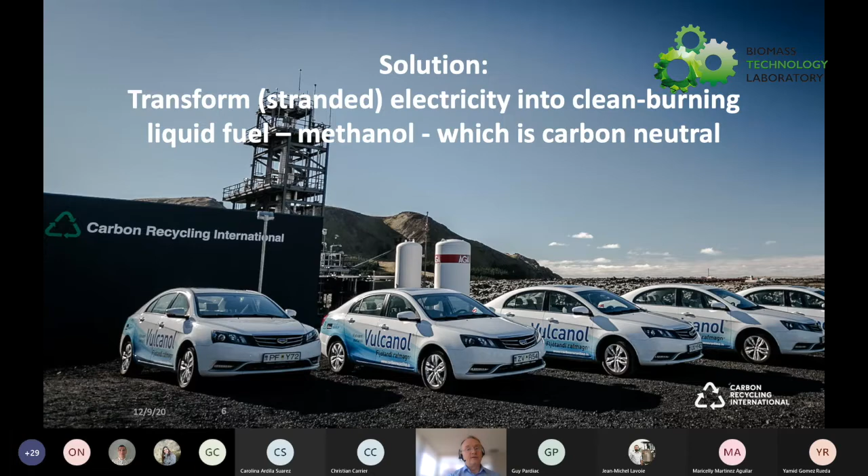And it's going to be very difficult for us to electrify this part of transport, for example, which will then also depend on the aspect of liquid fuel, which is much easier to store and transport. Electrification is the key to solving this problem, but we actually face a very peculiar problem: we have an abundance of renewable energy on Earth, but the location of this energy and its availability in terms of timing does not match the location and hours of demand. So this is why our company exists. We wanted to bring in a solution which allows you to transform stranded electricity, whether in time or space, into clean burning liquid fuel, and this process can be entirely carbon neutral.

Today, we are essentially a technology provider at heart. We are in the business of implementing commercial scale CO2 to methanol plants in both Europe and China, and hopefully we will also be active in North America, including Canada, in a short while.

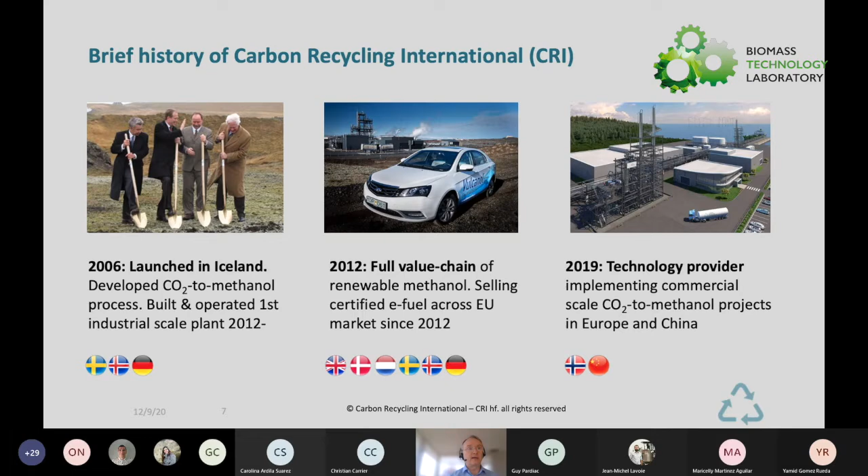This is a schematic of the platform we are talking about. We call this the emissions to liquids technology platform. It consists of three basic modules: the CO2 capture and purification module, and the module that supplies hydrogen, which can either be from water electrolysis or from byproduct hydrogen from industry.

The third module is our core technology, the emissions to liquids technology platform, which consists of three sub-modules: the compression aspect, where you compress the two gases, CO2 and hydrogen—the only elements we need—then the reactor, and then the distillation module, where we remove the water that is also formed in the reaction, as you can see from the chemistry.

To put a little more detail on this slide, what you see here is essentially the energy mass balance for this flow of materials and energy.

As you can see here, we need 200 kilograms of hydrogen per ton of methanol, which we can either obtain by electrolyzing water—taking in water and electricity and splitting that into oxygen and hydrogen—or we could rely on other industry to supply the hydrogen. For example, steel industry, represented by these icons, is an excellent source of byproduct hydrogen, and I will tell you more about what we've been doing on that front.

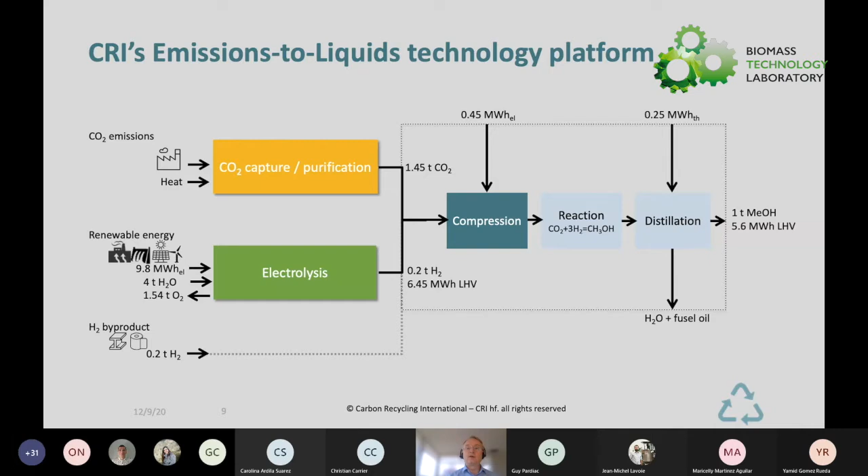In terms of LCA, what we're trying to do is reduce our dependency on fossil fuels and reduce the life cycle emissions of these energy carriers. The easiest comparison to make is with fossil fuels. That's already done on a regulatory basis, for example by the European Union, where we have a reference standard for the emissions that occur when you produce distillates, gasoline and diesel, and then the tailpipe or combustion emissions that result from the use of that fuel. That is what we're trying to offset.

We take in CO2 that gets embedded in the product, but pretty much the equal amount of CO2 that we capture and utilize is going to be released. But that CO2 is considered neutral because it would have otherwise been emitted, or it can come from a neutral carbon source.

If we use industrial emissions, that is allowed, even though they of course originate from fossil fuels, because they would have gone into the atmosphere otherwise. So as long as we can show that these emissions would have occurred anyway, they are considered neutral. What remains essentially is the carbon footprint of the energy we use.

In most cases, we're now considering electrolysis plants in systems which are already 100% renewable. Iceland is one such case, Norway is another, and increasingly in Europe several countries are approaching the 80 to 90% level in terms of grid electricity being renewable. With 100% renewable electricity, we are offsetting roughly 3.6 tons of CO2 emissions per ton of oil equivalent.

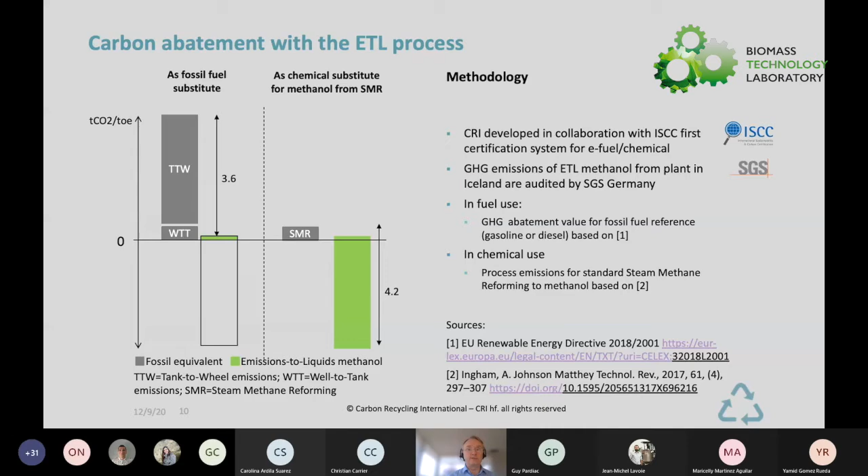Our company started, as I mentioned earlier, in 2006, and by 2012 we had commissioned the first industrial scale unit here in Iceland. It's actually a sizable plant, taking in grid electricity from the Icelandic grid and CO2 from an adjacent geothermal power station. We can produce 10 tons of methanol per day, that's 4,000 tons of methanol per year.

Our next two projects were outside Iceland, one in Germany last year and one in Sweden which has just concluded. The one in Germany focused on demonstrating that this synthesis system can be load following and adjust to intermittent levels of energy. In this case, an attached electrolyzer was being run on a simulated profile of wind energy, so it would go up and down frequently, and the synthesis system had to adapt in real time.

This system we built was actually smaller than the one we have in Iceland, only 1 ton per day, and it's actually transportable. The CO2 came from a lignite coal power plant.

The next project, just concluded up in the very far north of Sweden, was based on a very different approach. In this case, there was an existing research project to show that you could take blast furnace gas and, through what's called a sorption enhanced water gas shift, convert the carbon monoxide from the blast furnace gas into carbon dioxide and hydrogen, which are then the raw materials we need.

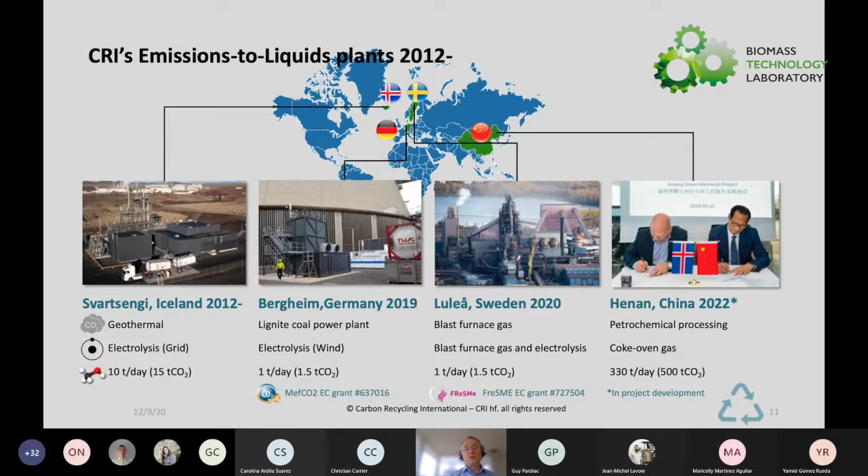In terms of using water electrolysis and renewable electricity, we are now developing a project in Europe, in Norway, with Statkraft, the national power utility of Norway and also the largest renewable energy company in Europe. This will be a similar size as the project in China, so 100,000 tons per year, or about 300 tons per day.

It will utilize electricity for electrolysis, so this will also be the largest electrolyzer farm in Europe, and perhaps in the world, when built, using 120 megawatts base load for electrolysis and another approximately 10 megawatts base load for other systems in the plant. The source of the CO2 is a ferrosilicon smelter, and one of the collaborators in the project is also the ferrosilicon company. This diagram explains a bit more how we interact with the upstream CO2 emitter and within the energy system.

The ferrosilicon plant already scavenges waste heat to produce steam, which is then used in power production. Some of that heat will now also be released to our plant, as well as the CO2, or rather the flue gas, which we will use an amine system to capture and concentrate. Electricity will be coming from the Norwegian grid, and the ferrosilicon plant will continue to sell some of the power to electricity generation.

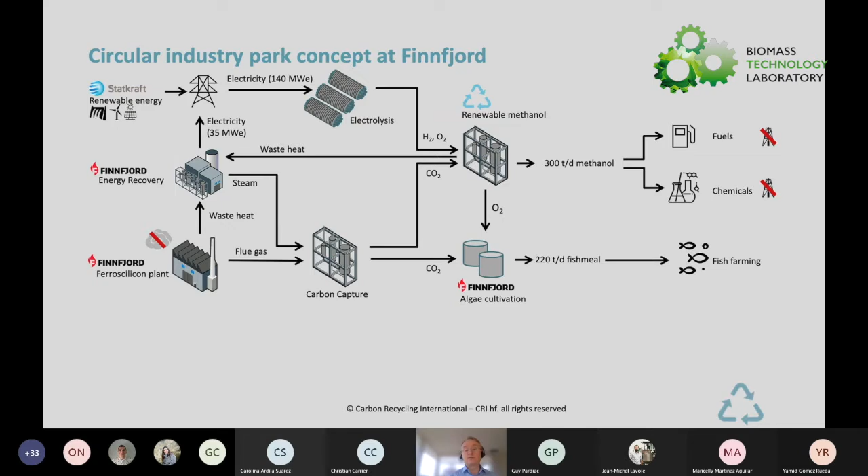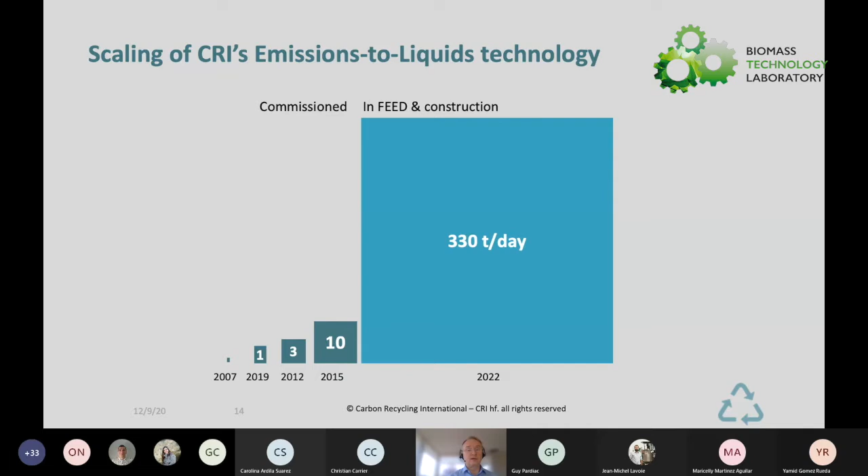So in a few years, we have been able to go all the way from liters to tons, to a sizable demonstrator here in Iceland, and now these 300 to 330 ton plants, the first of which will be commissioned in 2022.

But let me take a quick step back and tell you a little about methanol, which you've heard me mention several times. Just to clear up any confusion between methanol and methane, it's of course a liquid. That's one of the reasons why we want to produce and use it.

It is normally produced using a steam methane reforming process, in which you take natural gas, CH4, and crack it to make syngas in order to recombine and make methanol. That process relies heavily on access to fairly cheap natural gas. We don't have much in common with this process, except that in the overall scheme of things, you also end up with water and methanol, which you have to distill. We've developed a lot of our technology independently of this steam methane reforming process.

One thing people often get confused about is that they expect us to be producing methanol from syngas, which is what you obtain from steam methane reforming. But we don't go through that route. We go directly from CO2, a very inert molecule, and hydrogen, in one step, to methanol. Because of the additional oxygen in the CO2, we obtain a bit more water than you do in the steam methane reforming process. But fortunately, methanol and water are very easy to separate because of their very different boiling points.

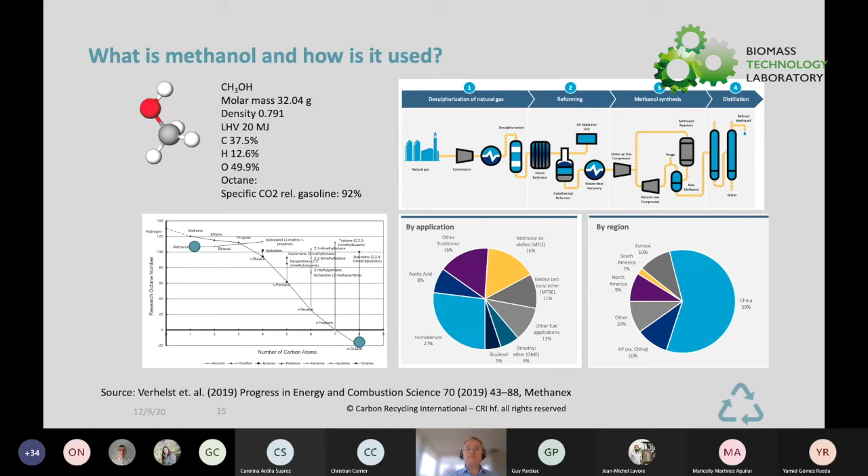So our process, as I said before, is distinct and different from the normal reforming process.

Benedikt, I'm sorry, I think you're muted. I think your mic is muted.

Okay, I don't know when that happened. Somebody seems to have muted me. I don't know how it happened. Sorry, was that just this one slide or more? Yeah, it's just this one slide. It just happened. Okay, so sorry. Okay, so let me just continue.

So one of the distinctions we have is that we now have an industrially validated system, with performance over tens of thousands of hours under normal industrial conditions. We have also demonstrated that this system is very safe for operators, working with lower pressure and lower heat than many other systems you might consider.

In terms of fuel utilization, I've already mentioned several points. The aspect that you have a single carbon atom with methanol and some of its derivatives, such as DME, which produce no soot, no sulfur, is ultra low in NOx emissions, with very low cost in making that NOx go away, and very low toxicity compared to many other fuels.

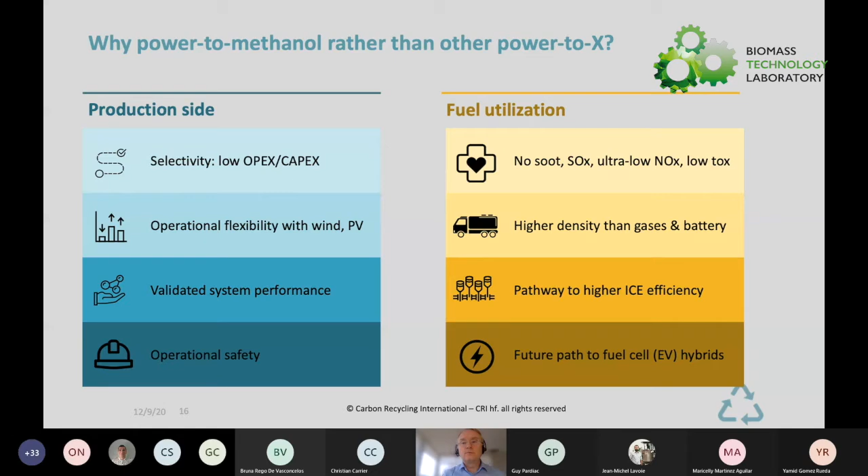Sorry, Benedikt, your mic is off again. Yeah, sorry, this is some bug in the system. Okay, I hope I'm back online. Can you hear me now? Yes, it's fine. Yes. Okay, sorry.

Okay, so I've mentioned this several times, that the issue at hand is to defossilize, and people are often very caught up in that they want to do this, especially in transport, with electricity. And why is transport, of course, also another focal point?

These are all numbers from the European Union, so only for Europe, but this applies to the rest of the world as well. Transport has been behind in the evolution, while most in Western countries, at least, industrial sectors have been quite efficient in reducing CO2 emissions. Transport has not done that, so there's a wide gap between the evolution of these two sectors.

If you look at transport, when you break it down, there's the lure of the battery electric vehicle for urban transport and some forms of mass transport in urban areas. But the amount of fuel used by the small and medium car population is actually quite low in comparison to the rest of the utilization of fossil fuels.

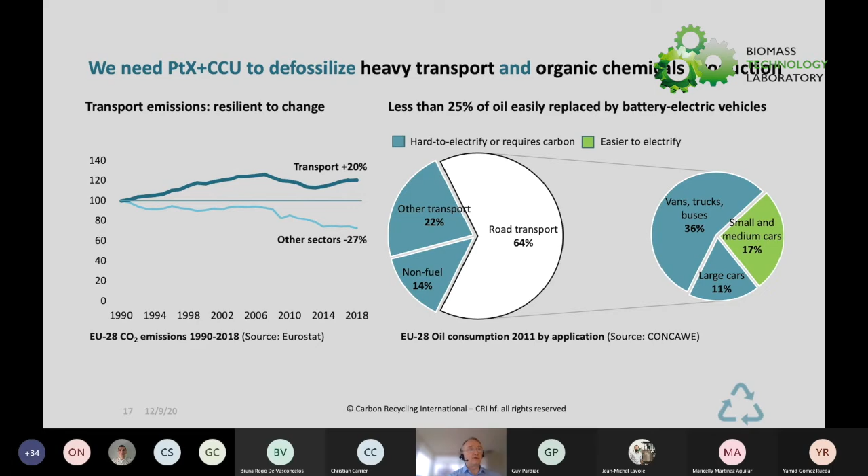Now, methanol, as I mentioned before, has a wide variety of uses. Even when everything is said and done about fuels, we will still be needing all of these hydrocarbons for industrial applications. As I mentioned earlier, there are traditional uses of methanol, such as through formaldehyde and acetic acid into textiles, adhesives, paints and coatings, etc. But there's also the opportunity to do all the chemistry you do today through ethylene and propylene, starting with the methanol precursor, or the methanol process rather, with the methanol to olefins process in between.

One example I wanted to show you quickly, a couple of samples in the chemical sector before I go on with more about fuels, is the utilization of resins in the wood industry, which might be of interest for Canada. Formaldehyde is a precursor for formaldehyde urea resin, which is then used, for example, in making laminated wood and fiberboard.

What I'm showing here is essentially that through this renewable methanol pathway, you can increase the amount of carbon embedded in the glue by about half. So you end up with, per ton of glue, roughly 0.6 or 600 kilograms of additional CO2, which would be coming in through this process of CO2 to methanol.

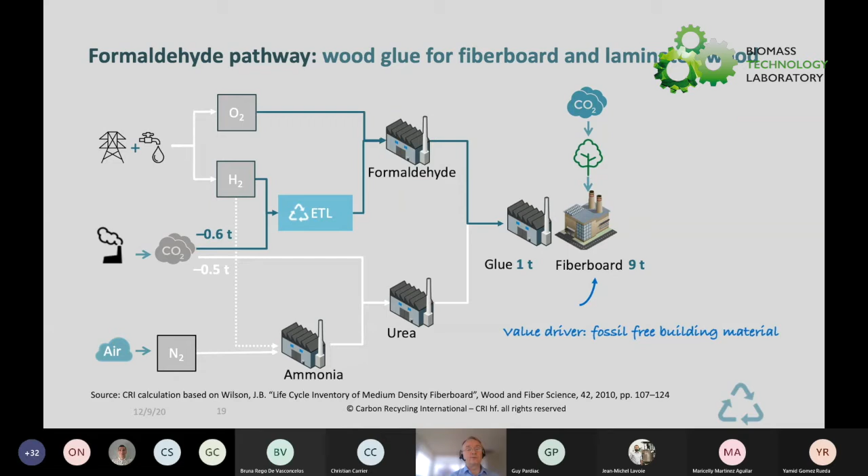Another thing we have sort of stumbled upon is that in water purification, done for raw sewage in urban areas, there's a very important step at the end, called the denitrification step. In essence, you have a bunch of bacteria living in this...